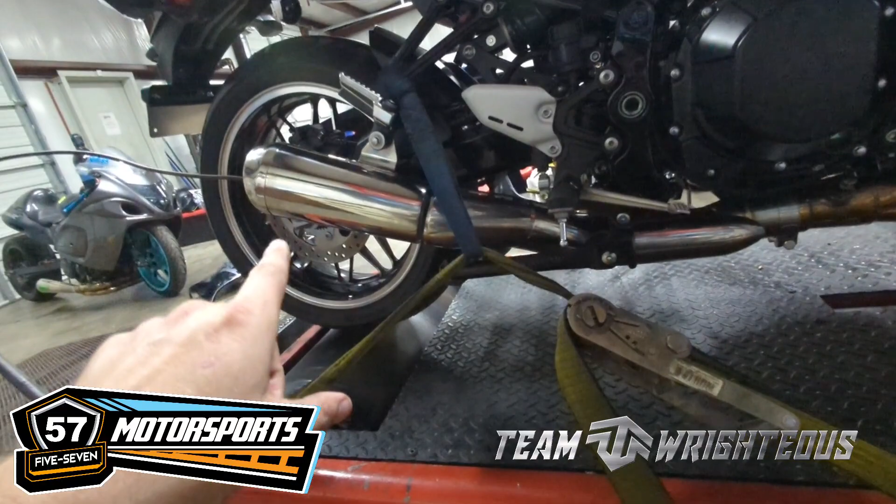We had it on the dyno in the past, and I'll show you those numbers in a minute. When it was bone stock, we put it on the dyno to see what kind of gains he'd make once he got the cat delete done. Now he's got the cat delete done and still has the stock muffler on here, but got rid of the big giant bread boxes down there. I think it looks really good with the stock muffler still on there, everything just kind of flows together and looks good on the bike.

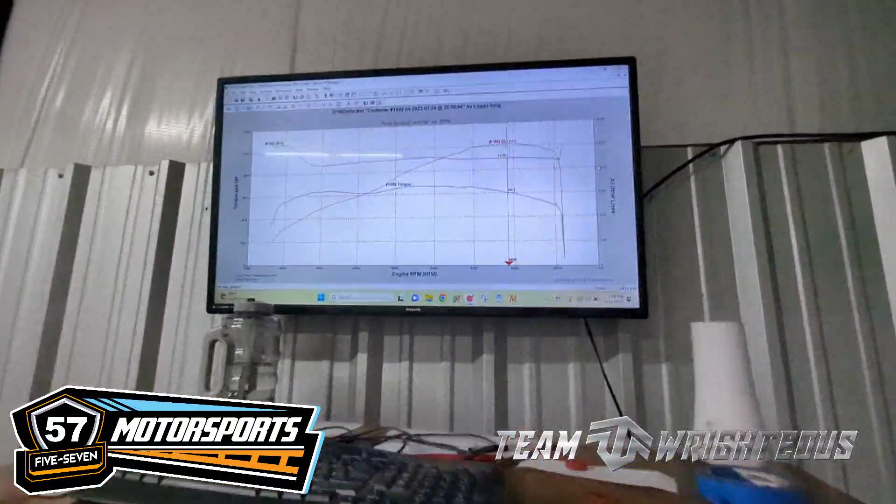So anyways, we'll flip over here and let you see where he was at before. Made 101.1 horsepower, and let's see what kind of torque he made - 67 foot-pounds of torque, so not too bad really. It's got a good bit of torque, just not a whole lot of horsepower. It's got the horsepower of a 600, but torque like an older school 1000 does.

Anyway, so we're gonna get this thing right here, make some pulls with it, get a baseline with where it's at now, and then start making some adjustments to see what kind of numbers we can get out of this bike. Alright y'all, so let's see what this thing here could do. Now we got it here and strapped up, ready to go.

Alright y'all, so we're back here with this Z900RS. You saw where we had made some pulls with it after the customer brought it back with the decat, and unfortunately we didn't have the correct box to be able to flash it. So now we got that, we're in the ECU, and we went ahead and made another pull with it. We want to make a fresh pull today to see what kind of gains we make from where we was at. I'll switch around here and let y'all see it.

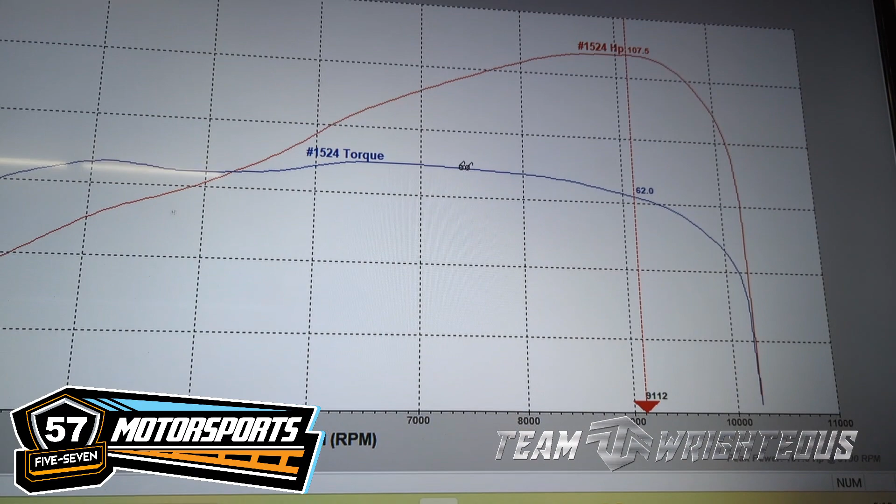Alright, so right now we are at 69.3 foot-pounds of torque and made 107 horsepower. This is a bone stock tune, nothing else done to it, all that's been done, like I said, is the decat. I'm going to pull up the graph from the initial pull we made whenever it still had the catalytic converter on it.

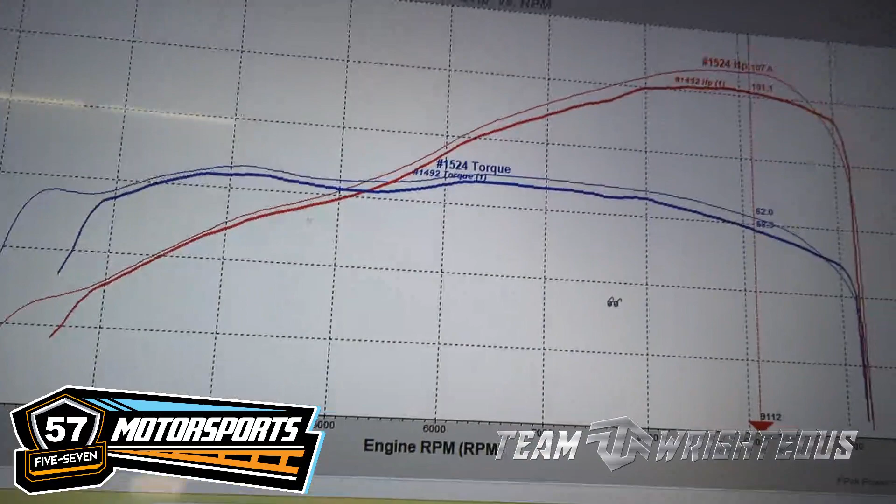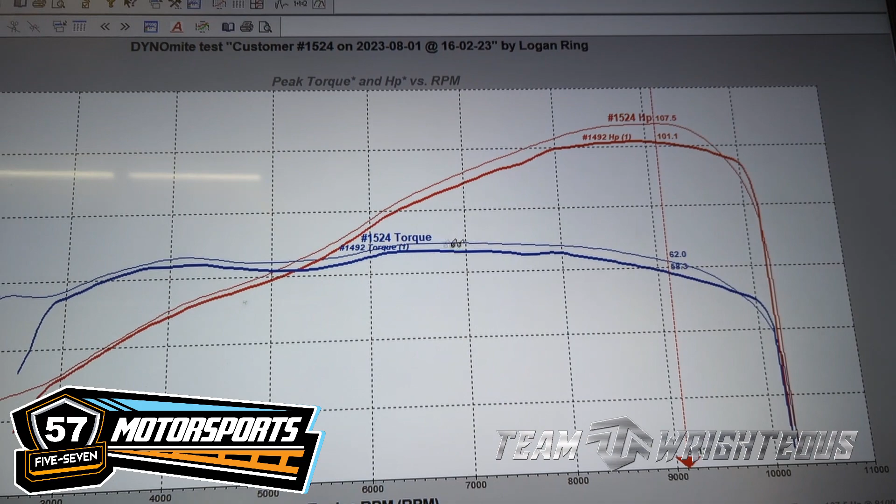Alright, so here we go. This bold line through here, that's the initial power it was making before we done the decat. The catalytic converter on these bikes is definitely a big restriction. It made 101.1 a little bit sooner than it made 107.5, so it gained right at 6 horsepower by just doing a decat.

So like I said, we're going to go in here in the ECU now, or we already have, and we're going to see how much more power we can make with this thing.

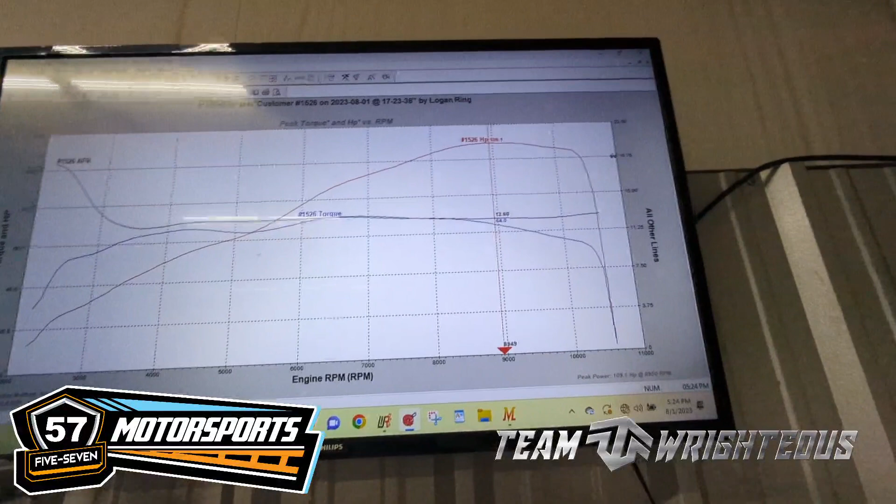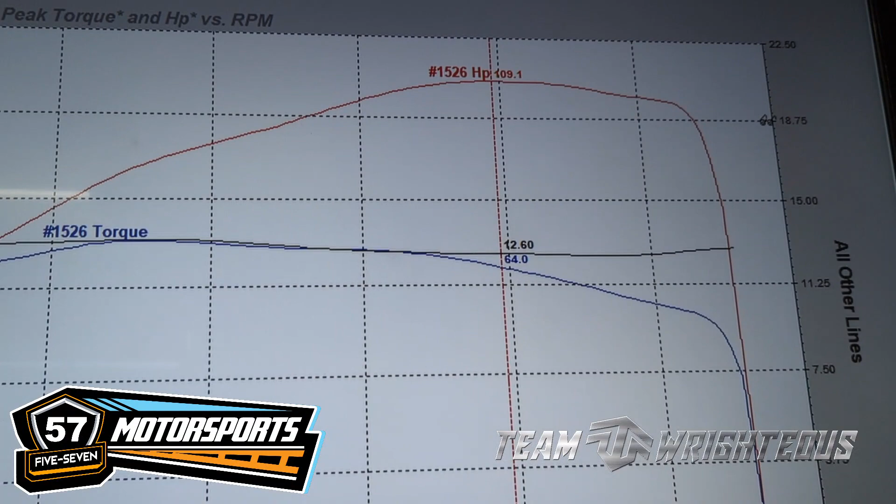What do y'all think about that stock exhaust? This is the stock muffler on this bike, the only thing that's been done to it is just a decat. And we gained some more here - still gotta pull some more fuel out of it up top, but we gained 1.6 horsepower on that pull, so we're up to 109.1. I believe with some more changes we can definitely get over 110. We'll see where we get to in just a moment.

All right y'all, so here we go. We made 109.1 horsepower a minute ago, and you know we can't finish there, so we made some other tweaks to it to see if we can make some gains. Hopefully we're going to definitely surpass 110, maybe make 111, 112. We'll see where we get at on this right here. Should be the last pull. We make 112 - you know I'm going after more though.

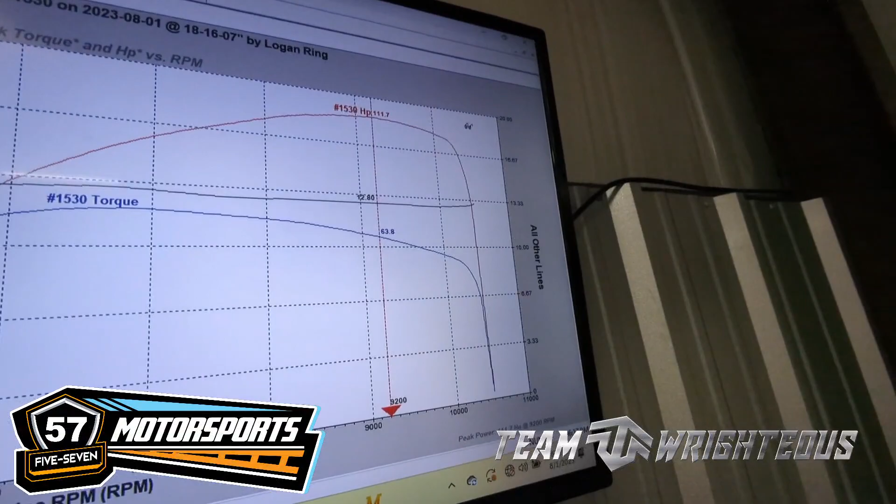111.7. Picked up 1.8 horsepower on that adjustment there. I definitely can see still some more stuff, so I don't think we're done yet. I think we can still get a little bit more out of this thing.

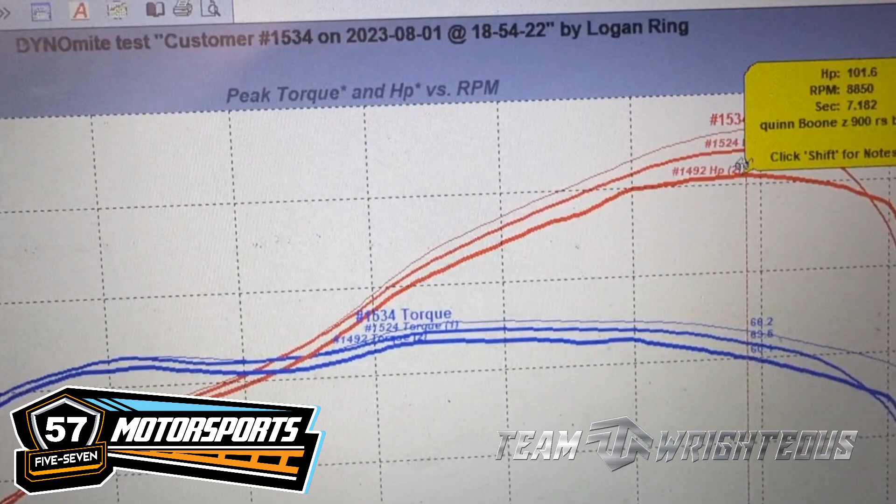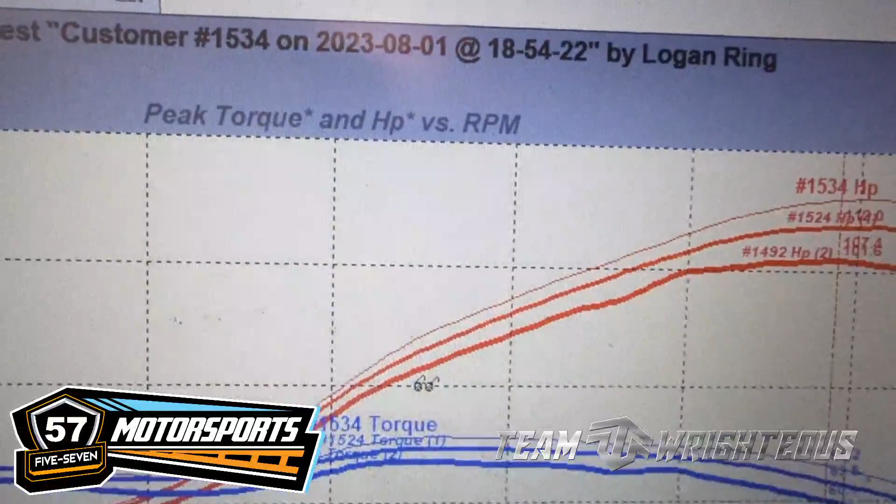101.6 may have been a little bit more in here. Popping stuff up there, but yeah, 101.6 horsepower there, and that was the bone stock untuned motorcycle. Came back,

and so we put it on the dyno and it made 106.8 horsepower, but we did not have the box to be able to flash it with, so we had to wait on that there to come in, and we put it back on the dyno once the box had come in. So it'd been like a week and the weather had changed and everything, and so the bike ended up making 107.4 horsepower that day. So that day we made 107.4.

So it's not to say that it gained an extra 0.6 of horsepower. It's just weather's different, bike's strapped back on the dyno again, so it's different. Everything makes a difference whenever you're trying the dyno. Y'all saw that there before with the 240 on the Hayabusa, that it ended up actually gaining horsepower just by putting a heavier wheel on there, which we all know is not going to make you go any faster, but according to the dyno, it made more power. So anyways, just wanted to show y'all that.

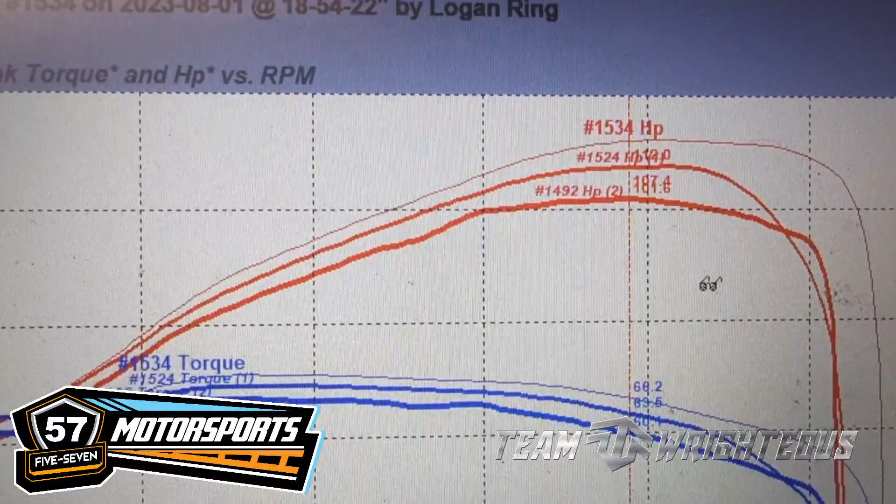But final numbers were 112.2 horsepower. So on the day that we dyno tuned it, we gained 5 horsepower that day. The initial number starting off at 101.6, so it could have been 101.6, could have been 102.2, if it was all done the same exact day at the exact same time, exact same temperature.

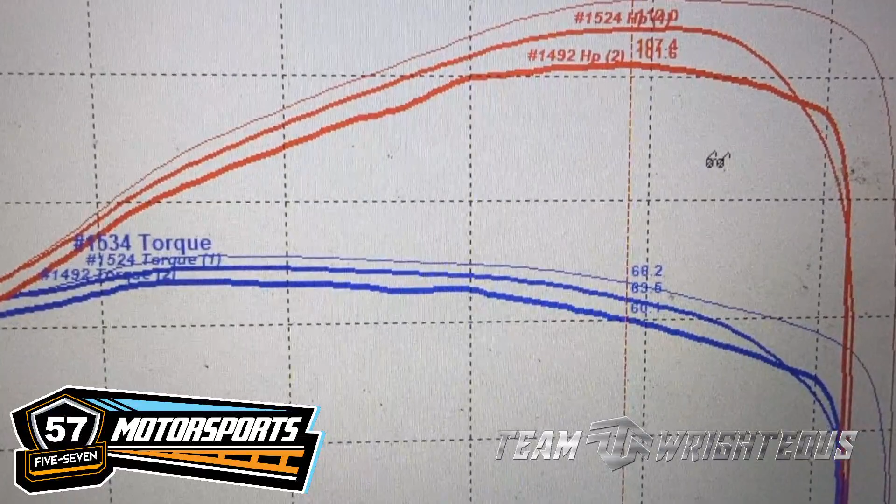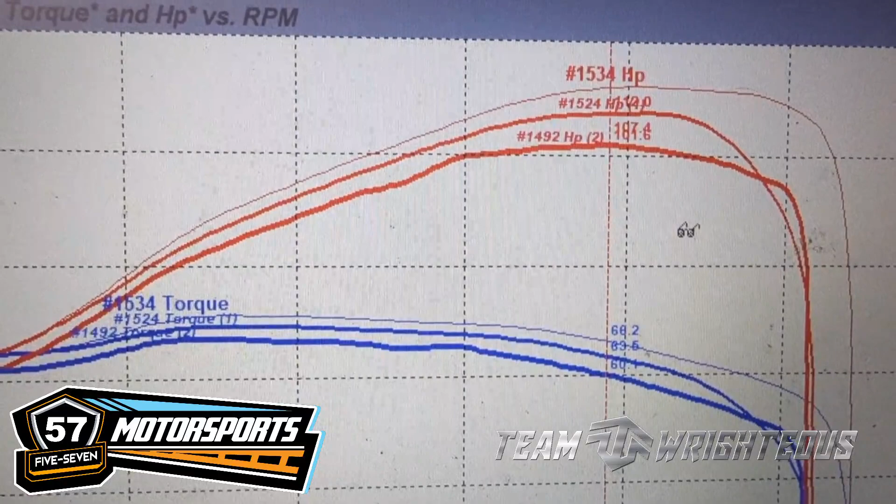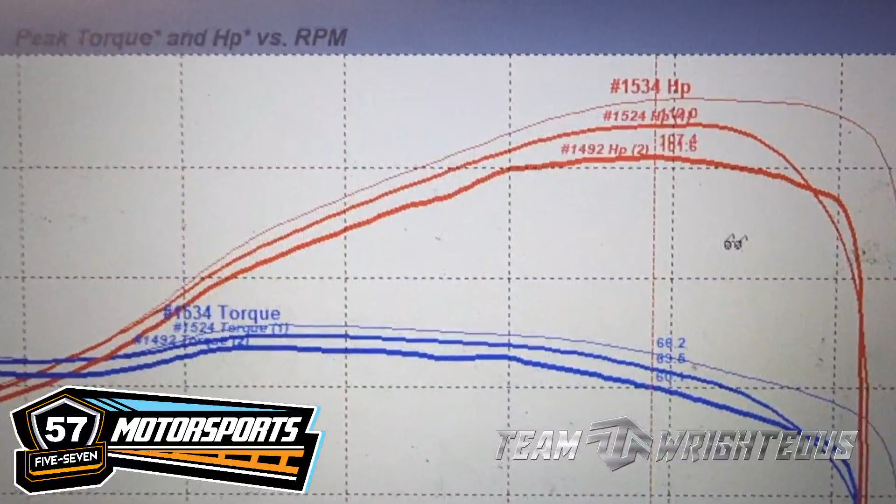And that's the thing is even if you were to put this bike on the dyno to start the day off, the only way you'd be able to do this is if you could do it within an hour while it's in the middle of the day with all the heat and everything else. So you have to really hustle to get something like this done. It's just impossible to be on top of it at the exact same moment. But all in all, to gain 10 or 11 horsepower from a decat and a dyno tune is really, really good.

And so the customer, when he picked the bike back up, he left out with it, and he messaged me that night. He said, man, this is a totally different bike. And I told him, I said, man, I couldn't agree more. I rode it myself, rode it down the road. It's a really good running bike, super comfortable.

Sits kind of tall, so it's a really fast turning bike. For those of y'all that haven't rode different kinds of bikes, a lot of people ride either sport bikes or cruisers or whatever they ride, and they don't really ride different stuff. So I get the benefit of riding different stuff from being here and owning different bikes. So when you ride upright bikes like the MT-09 that you're going to see later on the channel, you ride these kind of bikes right here, they kind of sit up a little bit higher. So when they turn in really fast, they're not like a sport bike. You don't feel like you're locked into the bike, but they turn a whole lot faster.

So anyways, but super comfortable bike, really enjoyed it. But anyways, that's gonna wrap it up there.